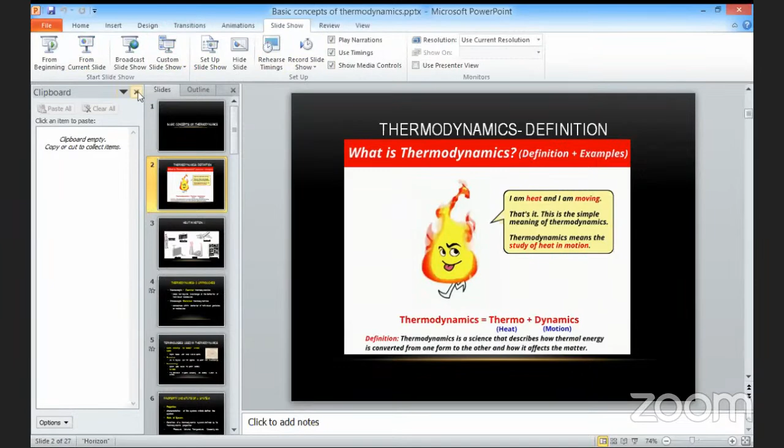Good. Now okay, ma'am. Fine. Okay. Yeah, I'll continue, sir.

So we'll start with the basic definition of thermodynamics. It means heat in motion. So it begins with our day-to-day life.

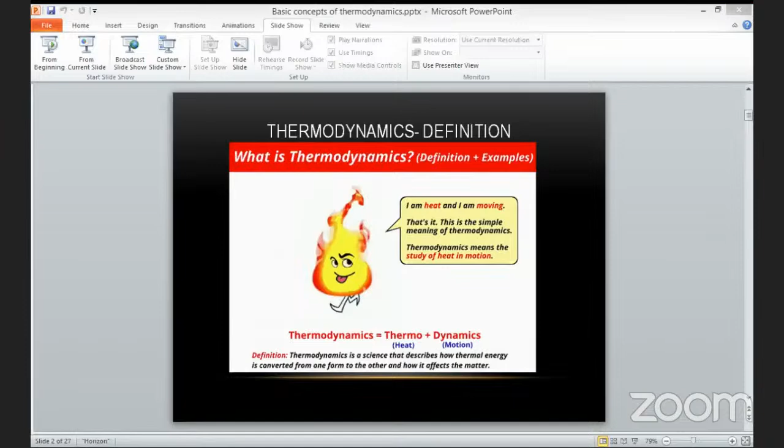Your voice is gone, ma'am. Yeah. Okay, fine. So can you see the next slide displayed, sir? Now it's moving, ma'am.

So this heat transfer is common from our basic human being to power plant. Every day we perspire and we generate heat. We take in heat as energy form, and this is heat in motion. If we take a power plant,

there are multiple thermal components such as steam turbine, heat exchangers, boiler, etc., where the thermal energy is being transferred and one form of energy is being converted to another form, and it is in motion, doing some kind of useful work. So there are two forms in which we can analyze this heat in motion.

Next slide. Third slide. That side is only visible.

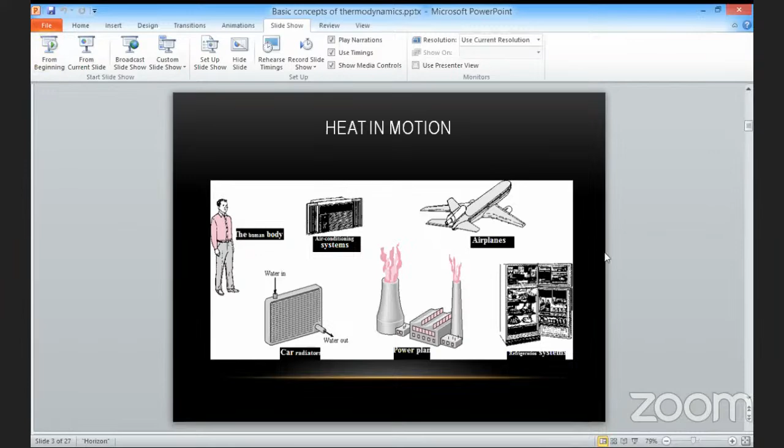Yeah. There are two approaches. One is the individual molecules. Amount of gas is occupied in a cylinder, in an IC engine. We will be dealing with the net effect of the whole system. What is the effect? Net pressure, temperature, and volume. We will not be dealing with the individual molecules and their effects. And most of our study in thermodynamics will be of the macroscopic form.

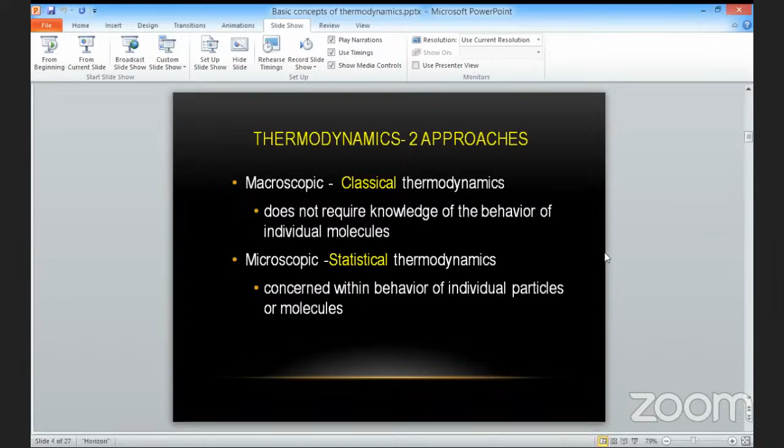Whereas there is another study, which is called statistical thermodynamics or the microscopic level, where the van der Waals forces, the colloidal force, the behavior of all individual particles will be studied, and their effects, the interrelation forces. So whatever we deal with in the energy audit exam will be at the macroscopic level.

And the basic terminologies used in thermodynamics are system, surrounding, boundary, and universe. System is the region where we are going to focus. If you are going to study the steam turbine, you focus on the parameters under study, so that steam turbine is termed the thermodynamic system. And whatever surrounds the steam turbine and has some effect on it is termed the surrounding. Surrounding means it should have some effect on the system.

Say, for example, you have a classroom of n number of students, and it is considered to be the system; the space outside the classroom, say there is some noise outside, naturally will have some impact on the classroom. So that will constitute the surrounding. Similarly, if you take the steam turbine to be the system under study, the region outside, maybe atmospheric, is called the surrounding.

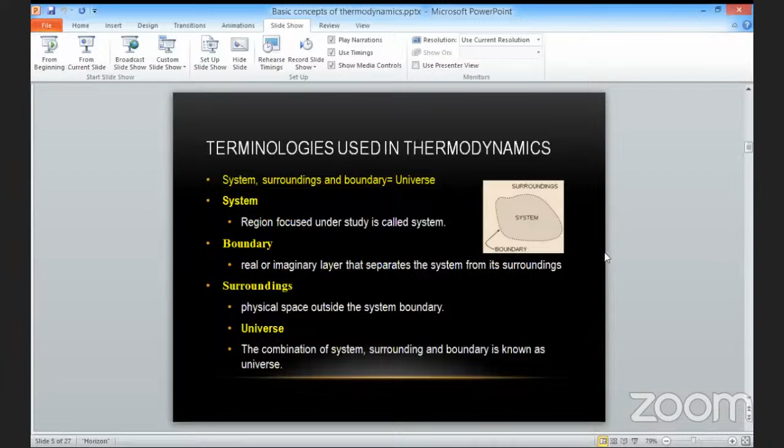And we need to separate the system and the surrounding. That is usually by an imaginary layer that we call the boundary. And all these combined we call the universe. And the study of universe related to entropy forms the second law of thermodynamics.

Coming to the property and state of a system. So properties: if you need to describe a system, we need some characters to define it. So in a thermodynamic system, there are three basic properties which are normally utilized to define the system, and they are the pressure, volume, and temperature. So PVT forms an important significance; wherever analysis is there, we will be dealing with these three characteristics.

Any plot, any graph to be plotted, we will go for a PV plot or VT plot or PT plot. So these are the thermodynamic characteristics of the system. They define the thermodynamic system. Say particularly at one point, we need to measure the pressure, volume, and temperature. We cannot measure at random. When we need to measure, the system has to be in thermal equilibrium. I'm sorry, it should be in equilibrium, whatever may be the equilibrium. It may be thermal or mechanical or chemical. So at one condition, we will be measuring the thermodynamic property, and that we call the state of a system.

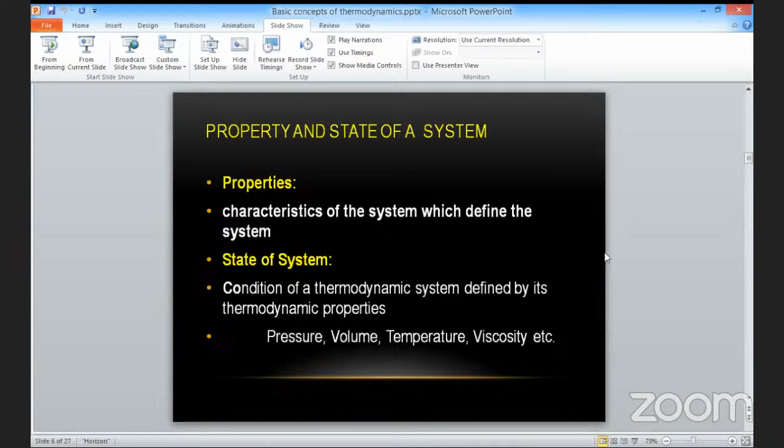So the thermodynamic systems, if we take them, there are many types. Of course, the three main ones: one will be the closed system, where if you take a system under study, only energy transfer is there, there is no mass transfer. Then you call it the closed system. And you separate it by means of an imaginary line, that we call the boundary.

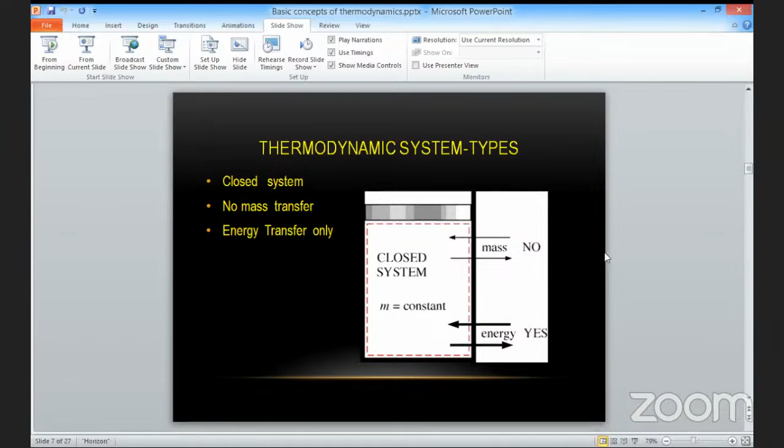The other system is the open system, where mass transfer is there, and also energy transfer is there. A typical example we can take is a steam turbine, where a quantum amount of heat energy in the form of steam is entering the steam turbine, and it is leaving as exhaust steam after doing some work. So we cannot go behind the steam and study. So what we do is we control the volume by means of drawing a line that is called the control surface, and that volume is termed the control volume. The boundary separates the system and the surrounding. In case of an open system, it's called the control surface. So here, mass transfer will be there, energy transfer also will be there. So this you term the open system.

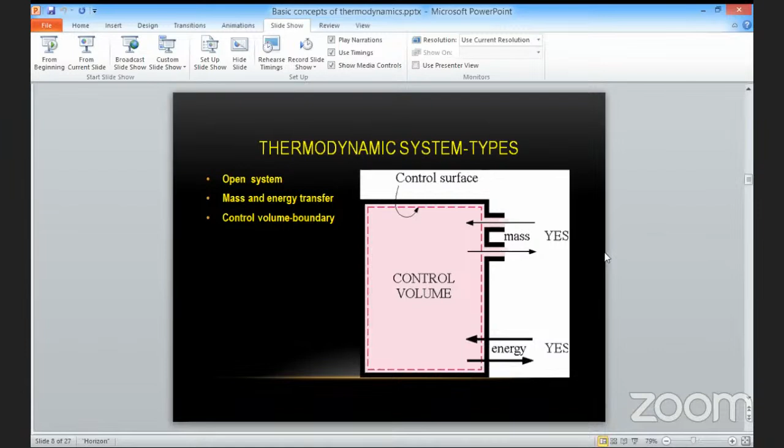And the third variety, we call it the isolated system, where there is no energy transfer nor mass transfer. The system is completely isolated from the surroundings. We create such an isolated system. There is no isolated system in nature, but we create it.

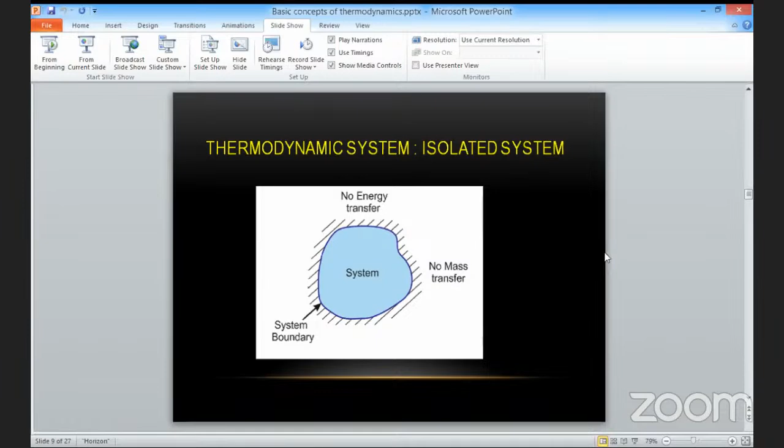So to be very familiar, we can take the typical example of hot water getting boiled in an open pan. So here, energy and mass transfer is there. Both are getting exchanged. So this is an open system. If you cover it with a lid and again you heat it, the mass doesn't change, but only energy is exchanged. So it's a closed system. The same hot water, we are going to pour it in a flask and keep it closed. Then you don't have the energy and the mass transfer. So you create an isolated system.

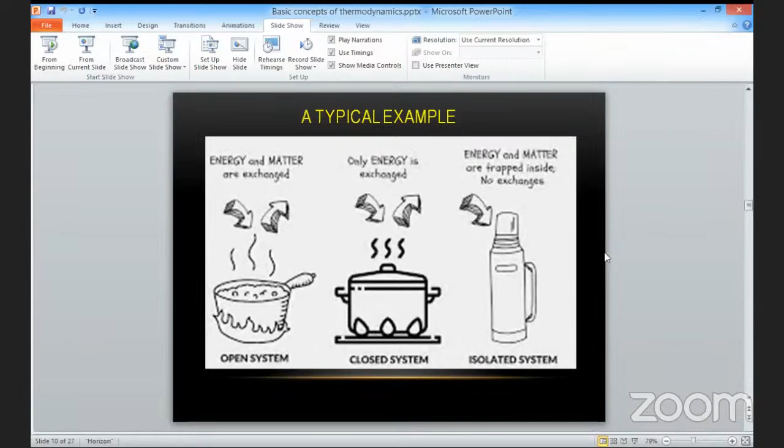The other one, we move to thermodynamic equilibrium. So equilibrium itself means it's a state of balance. So when a process is occurring, you cannot go behind and take the characteristics. When you need to measure the characteristics, the property should be in a definite state. So if a system involves thermodynamic characteristics, then you call that system a thermodynamic system. So when can such a system attain equilibrium? Scientists have analyzed and come to a conclusion that a thermodynamic system is said to be in thermodynamic equilibrium if it has three equilibria attained.

One is the thermal equilibrium. That means the temperature of the system should be even throughout the system. And the second one is the mechanical equilibrium. Its pressure should be uniform, or there should not be any unbalanced forces involved in it. The third one is the chemical equilibrium, where there will be no reaction; the forward will be equivalent to the reverse. So three such equilibria exist in a thermodynamic system. Only then do we say that the system is in thermodynamic equilibrium.

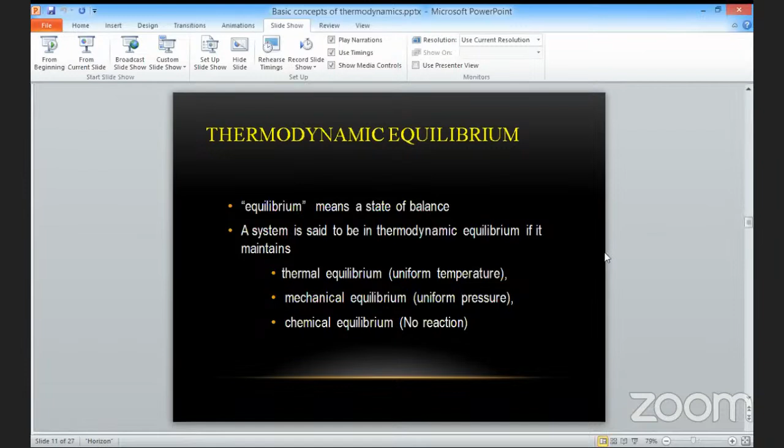And process. So we had initially seen what is a property and how does it relate to the thermodynamic system. So when you define a system, say for example, take the same condition of the steam turbine at a particular instant, pressure P1 and temperature T1. Steam is entering into the steam turbine.

You measure the parameters. We say it to be the boiler pressure. So boiler pressure, the corresponding volume and the temperature. And that we mark it to be the point A in the PV plot. And when this steam is made to pass into the steam turbine, the work is done by the steam because it contains enormous amount of thermal energy, and it has to do some work by making the blades rotate.

The heat energy is being converted to mechanical energy, and since the work is done by the steam, the energy from the steam is lost and the volume pressure decreases to a point, say B. So what happens here is the system changes from one state to another state. Say at the exhaust, before the condenser, if you need to measure the steam at a pressure, condenser pressure, say PC, and volume and temperature.

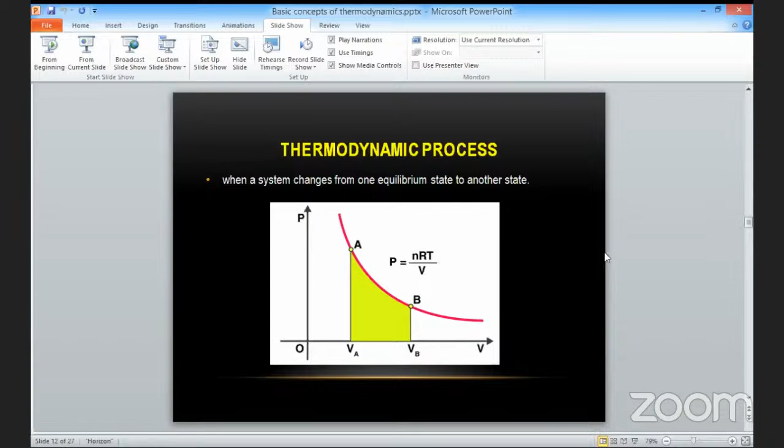Here you can say the system has been changed from point A to point B, or from state A to state B. So the system is said to undergo a thermodynamic process. So here the process is expansion because it is being expanded. So considering this, we have 4 main varieties of processes, basic process. One is the

isobaric process. Earlier I told you there are 3 main parameters: volume, pressure, and temperature. So while the system is doing some work, normally it is the routine way of keeping one parameter to be a constant. So that is what the gas laws also tell us. So isobaric process is a process where we maintain the pressure to be constant. So volume and temperature here will be varying, whereas you maintain the pressure to be constant.

An isothermal process, it is a constant temperature process. Here also we maintain the temperature to be constant, whereas pressure and volume will be having a change. And isochoric process, where the volume will be held constant and pressure and temperature will change. And the 4th process is the adiabatic process, where it is similar to isolation. There will not be any heat transfer into or from the system.

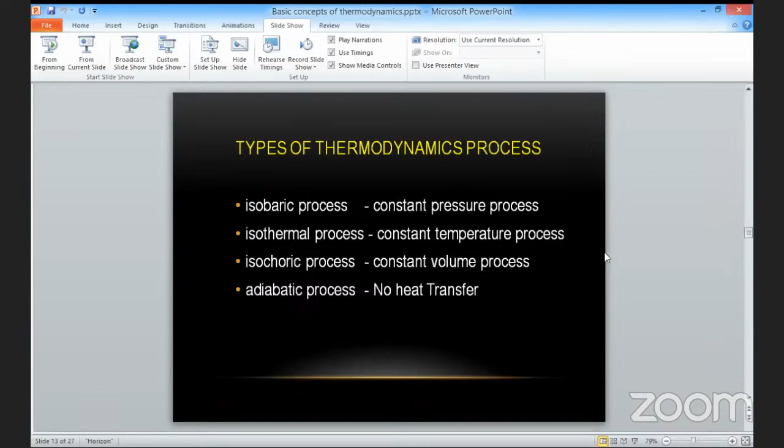And here also we create such system. And in thermodynamics, all the reversible processes which are adiabatic, they are called the isentropic process. We'll see that entropy is a new derived property. So this is designated here in the form of PV diagram. So isochoric, the volume is constant, so it's a vertical line. Isobaric process, it's a horizontal line where the pressure is constant.

And isothermal is a curve where the curve is governed by the law PV is equal to constant. PV is equal to nRT, so n is a constant, R is a constant. Again, temperature is a constant, so nRT is a constant. So PV is equal to C in the case of isothermal. Whereas adiabatic, you have an adiabatic index called gamma. And the value of gamma is 1.4. So that curve will be governed by PV power gamma is equal to constant, where gamma is 1.4.

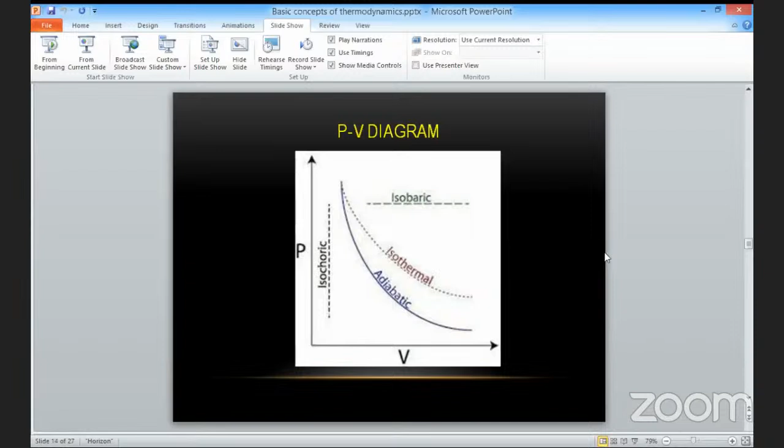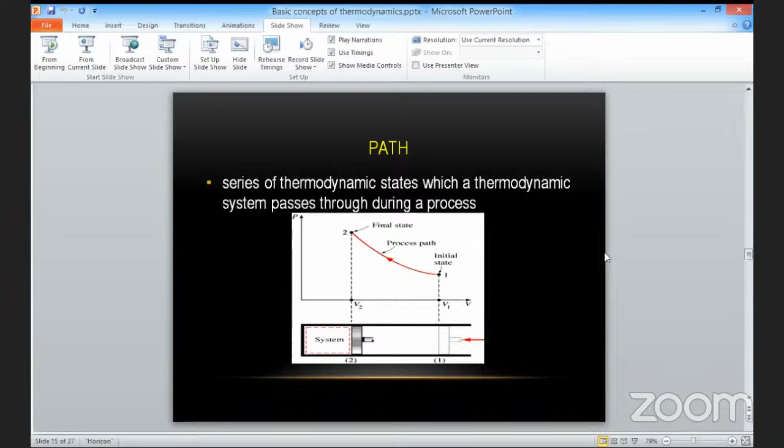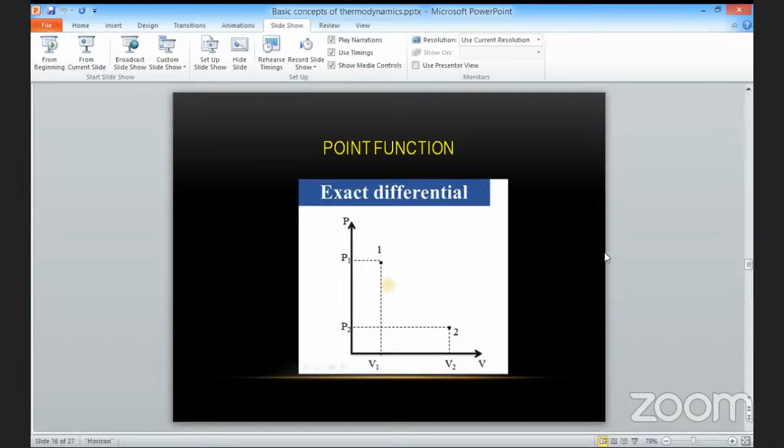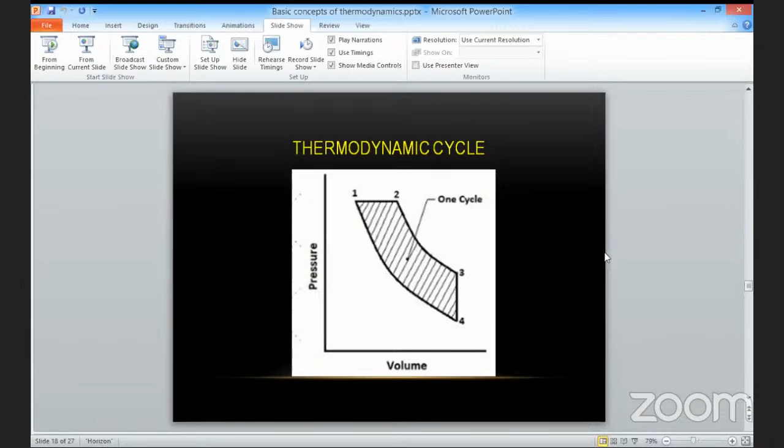If n number of processes are executed by the thermodynamic system and the system returns to the initial state, then the system is said to have executed a thermodynamic cycle. Here the graph shows 4 processes: 1 to 2, 2 to 3, 3 to 4, and 4 to 1. In the final stage, the system returns to its initial state where it started. And it's a PV plot.

Everybody will be familiar with the zeroth law of thermodynamics, whatever discipline we have taken. You might have studied it in the 3rd semester. It's a very famous 2 marks question also. Why is it named the zeroth law? This law was formulated after the first law of thermodynamics, but it formed the basis of thermodynamics, the basis for temperature measurement. No other number was there, so 0 was given, and it was named the zeroth law of thermodynamics.

It states that if there are 3 systems, say A, B, C, and A and B are in thermal equilibrium with each other, and A and C are also in thermal equilibrium with each other separately, then B is in thermal equilibrium with C. Thermal equilibrium means the temperature should be the same. So this law made the base for temperature measurement, which is what we do in day-to-day life when measuring temperature for fever.

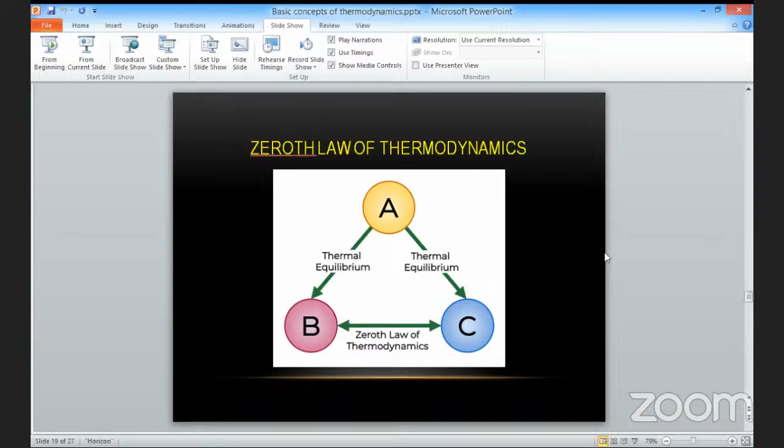We have 3 systems: the human body, the temperature measuring equipment, and the liquid rising inside the measuring tube. Once we keep the thermometer, we don't take the temperature at once. We leave it for a few minutes until equilibrium is achieved, and then we measure the temperature. So this is the zeroth law of thermodynamics. And this is the first law of thermodynamics.

Joule, a scientist, made some experiments. The base for the first law of thermodynamics was the law of conservation of energy, which says that one form of energy is converted into another form. Energy can neither be created nor destroyed. Take the simple example of a human being: we take in food, do some work, and the energy is exhausted. Again some form of energy is taken in. One form of energy is being converted to another form.

Joule did an experiment called the paddle wheel experiment, which had a container with a stirrer, with a paddle and pulley arrangement moved by a weight. He did it many times and came to a conclusion. Whenever the weight was put on the pulley arrangement, the stirrer moved, and the fluid inside became hot after some time. After multiple experiments, he concluded that work and heat are mutually convertible. Finally, the first law of thermodynamics was stated as: work and heat are mutually convertible to each other.

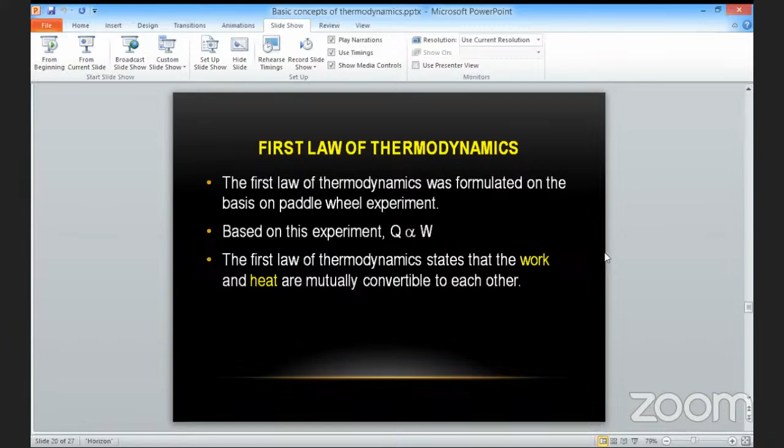So here we have three definitions or three forms of energy. One is the heat, another one is the work, the other one is the internal energy. So we define heat to be one form of energy which is transferred from one body to another whenever there is some difference in temperature.

Suppose you have a cup of hot tea available to you. Initially, say it is at a higher temperature. After a few minutes, the tea gets cooled due to the heat transfer from the tea to the ambient temperature till equilibrium is attained. Once equilibrium is attained, you cannot cool the tea. So it is by natural convection, and thereby you say there is some heat transfer.

And that is one reason why we people like to drink tea hot, because we feel that some energy is going inside. So that is basically given by the equation Q = mCp ΔT, where ΔT is the difference in temperature. In this equation, Q will be given in terms of joules.

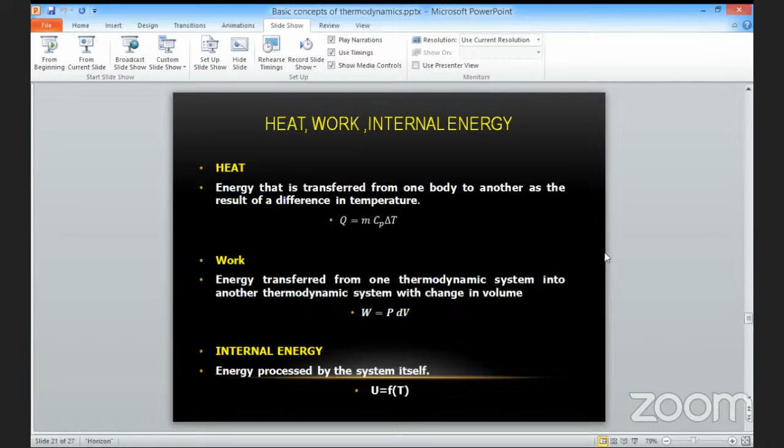So putting the three forms of energy together by applying the first law of thermodynamics, we get the non-flow energy equation. That is ΔU, or dU, is equal to Q plus W, which relates heat, internal energy, and work. In all the equations, you have the energy in the form of joules.

So ΔU will be mCv dT, in terms of joules, and Q is equal to mCp ΔT, in terms of joules. And work is equal to pressure into difference in volume, in terms of joules. So this equation is termed the non-flow energy equation. Now we'll apply this equation to all the processes we have seen earlier.

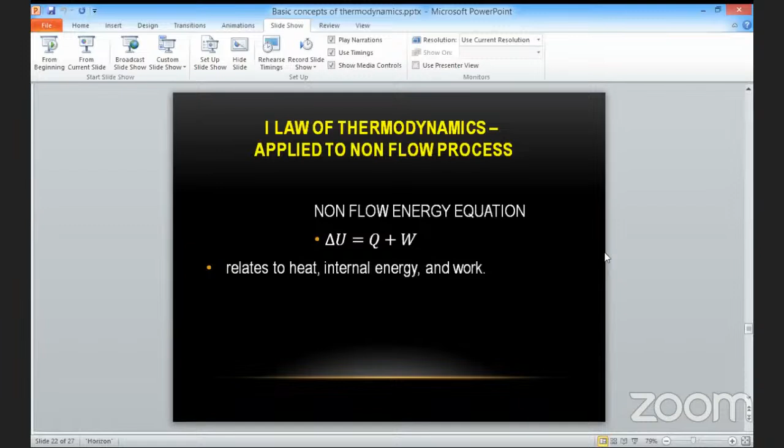So here we apply the non-flow energy equation to a constant volume process. We know by the non-flow energy equation, dU is equal to Q plus W. But work done is 0 for a constant volume process, because work done is given by pressure into difference in volume. When it is constant volume, dV will be 0, so the entire term will be 0, and thereby dU is equivalent to Q.

Which implies that in a non-flow energy process, and that too in a constant volume process, whatever heat is supplied will be utilized in the change of the internal energy. That means two conditions arise. If heat is rejected from the system, the internal energy of the system decreases. If you add heat to the system, the internal energy of the system increases.

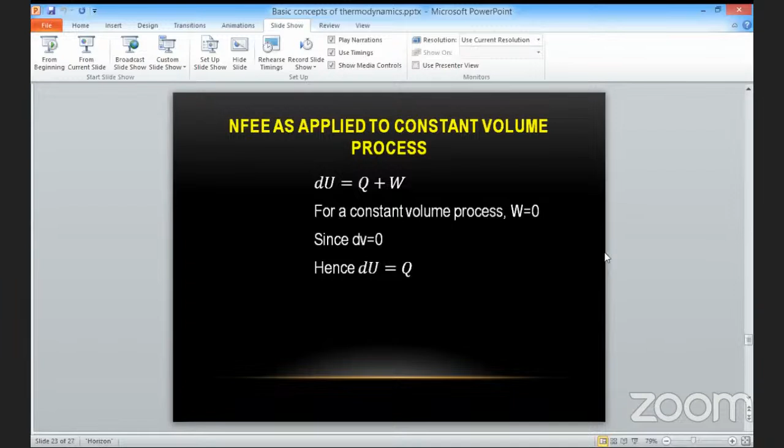Take the case of a boiler: you are adding heat and thereby the internal energy of the boiler will be higher. It keeps increasing till you stop the addition of heat. In the case of a condenser, it will be the reverse process, where heat is rejected to the atmosphere and thereby the internal energy of the condensing system decreases. This is the inference based upon the first law of thermodynamics. Now we'll apply it to the constant pressure process.

So the non-flow energy equation, when you are applying it to a constant pressure process. So pressure will be constant. There will be some change in volume. Q will be there. And since both are having a change, dU also will have a change.

So the equation is dU is equal to Q plus P into dV, where here the P into dV, we call it the flow work, because there is some pressure and there is some flow of fluid or gas, whatever may be involved in the system. So there is some flow. And this is also a form of energy, and it's called the flow energy or flow work.

So the combination of U plus PV, you call it another property called enthalpy. So it's a derived property and it is given by U plus PV. The Q will be equivalent to dH. So during a constant pressure process, in a non-flow energy process, whatever may be the heat supplied, dH, called the enthalpy, is equal to the heat.

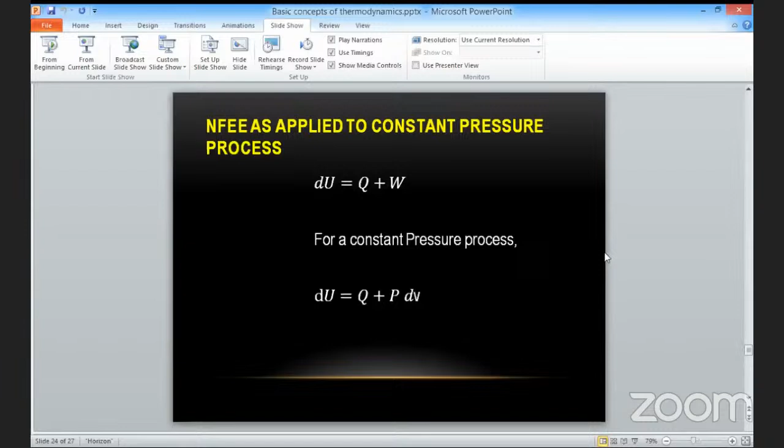And now we'll apply this non-flow energy equation to a constant temperature process. So for a constant temperature process, again, dU is equal to Q plus W. This is the non-flow energy equation. For a constant temperature, T will be constant. So as said earlier, U is a function of T. Internal energy is a function of temperature. So the change in internal energy will be 0, and thereby Q will be equivalent to P into dV.

Or you can say from this equation, for a constant temperature, whatever may be the work done, it will be utilized. Suppose if you don't take in any food and do some work, at the end of the day, you'll be exhausted because whatever work you do, it will be consumed from your own internal energy. So like that, the work done will be utilized from the internal energy of the system.